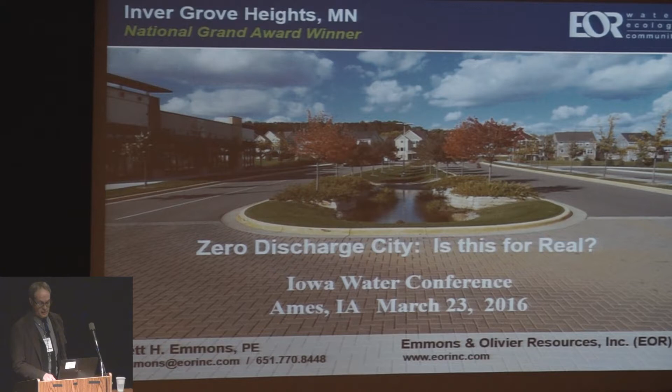So first of all, I just want to start out with kind of the context here and the primer. Stormwater management really and runoff management is evolving quite a bit. If you think back 20, 30 years, the philosophy was much more on a matter of getting the water away, move it on downstream, get it off your site, let somebody else deal with it. That gave way after the Clean Water Act, after we cleaned up the wastewater treatment plants and industrial discharge, and found that our waterways were still impaired. There were still a lot of problems. The fish were not safe to eat, not swimmable. We started coming in with these approaches of temporary storage, building ponds everywhere after the 70s.

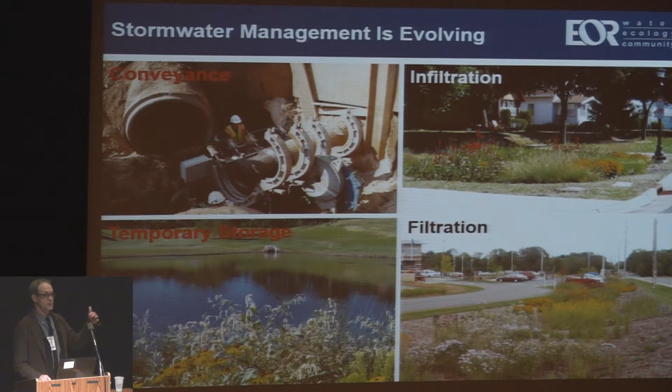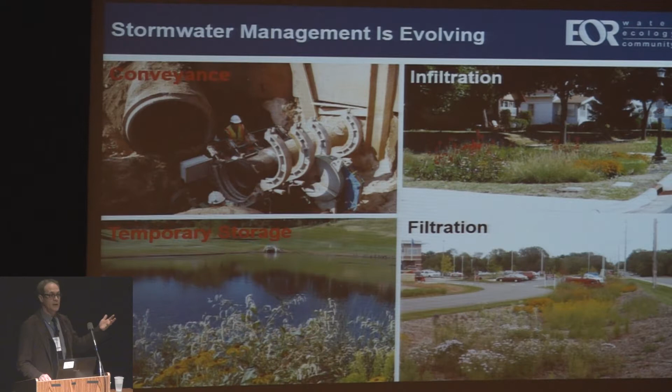After a while, though, we started realizing that still wasn't getting us far enough. It was kind of an early triage approach. It provides some benefit - it settles out some of the sediment and the pollutants that are attached to that sediment. But it really wasn't going far enough to get the improvement that we wanted. So the new modern era is much more based on principles of trying to keep the water closer to the source with infiltration, filtration, all sorts of methods like that. There are other methods as well. So we've kind of gone from this early stage of conveyance and short-term ponding to looking at stormwater very differently in the last 10 to 15 years, really. It's been something that's been sweeping the country from the coast, and I know in our area it's become a very big hot topic for runoff management.

I think part of that was reflected around 2009 when the National Academy of Sciences had a report that got some leading experts in the country together and said, you know, we've always been so concerned about the pollutants in the runoff, but really the underlying crux that's bundled up with all those concerns has a lot to do with the overall volume. As we alter the landscape, we're creating a lot more runoff, a lot more pollutants, but also a lot more runoff to carry those pollutants. And that becomes very hard to control. So their recommendation coming out of that report was, rather than focusing primarily on the chemicals, we need to increase our focus on the actual volume of runoff coming off the site. And then by de facto, you will also be addressing the chemical pollutants that extra water is carrying.

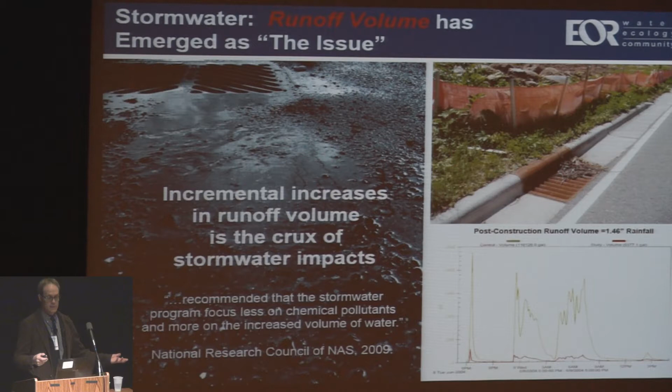So I think it's always important to start with, what is the problem? What is it that we're trying to talk about? So just a little bit of Hydrology 101 here.

In a natural landscape, these are generalized numbers. Typically you might see something like 10% of the water comes as runoff or yields out of the system. 40% typically might be taken up by plants, evaporated, and then almost half of the volume would percolate down into aquifers and replenish our aquifers.

When you change the land use, that changes quite a bit. In an urbanization setting, you can have a five-fold increase in the amount of yield and runoff that comes out of the landscape. That's a very large increase in volume, creating a lot of hardscape. You're impacting the soils—the processes that would hold that water aren't there anymore, so the water is typically being shunted off downstream.

There's still some vegetation in urban landscapes—you might have 30% still taken up by plants. A very small amount actually ends up percolating back into the groundwater. As we're seeing in our area where there's a lot of groundwater potable water sources, this is becoming its own big issue. Aside from all the water quality issues happening in surface water bodies, there's also this issue of what's happening with our water supply and those groundwater aquifers.

I would point out there are similar trends in an agricultural conversion from a natural landscape to an agricultural setting. The numbers are a little lower, but still fairly significant in terms of how much yield is coming out of the system when you change that to an agricultural landscape.

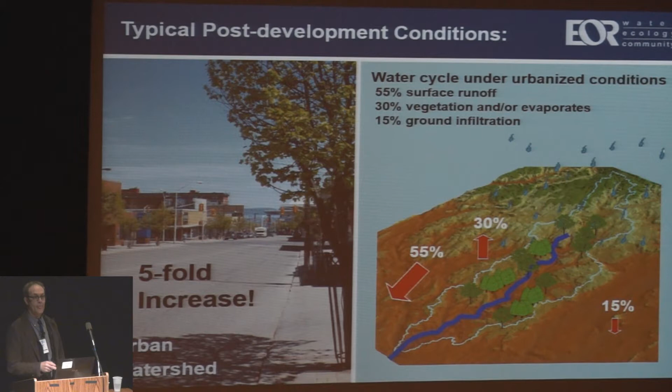Just to prove that I couldn't resist tweaking my presentation at the last minute—when I was in my hotel room and picked up the paper this morning, this was on the front page of USA Today, talking about water systems, and around the country some new studies coming out about how a lot of water systems are indeed in peril, and we're not really doing a great job of cleaning those up. We know that they're there, we know they're problems, but we're not getting to them.

So it is an issue everywhere, and I think it's an issue that's just going to keep getting bigger and bigger, both in our awareness of it and in terms of the critical nature of it. It's not something that's going to go away anytime soon.

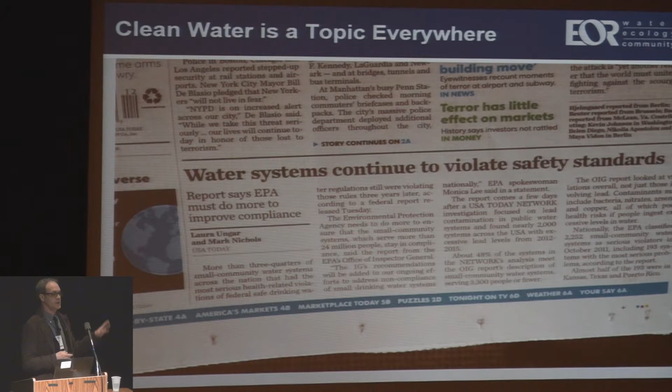What I'm going to do is walk you through a story of the city of Inver Grove Heights. They had a very large area that they saw urban expansion coming to, and they had some real infrastructure challenges. So they spent over 10 years trying to figure out how they were going to manage all the infrastructure challenges that they had with this.

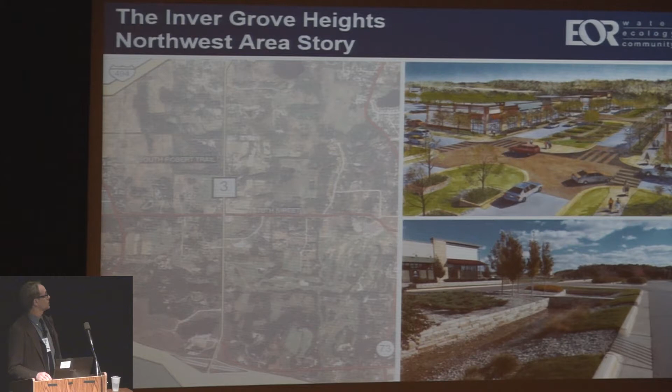And it turns out that stormwater really came to the top as one of the key issues that they were wrestling with, trying to understand how they were going to see development evolve.

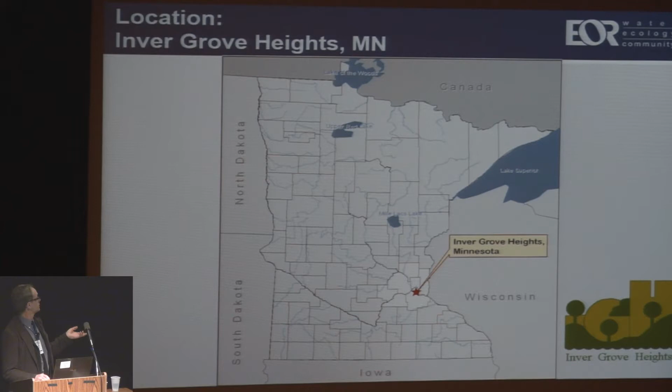The takeaway is, it's in a prime location—as with all real estate, location, location, location. There was pretty intense pressure to see this area develop because it was in the urban corridors, very close to interstates, actually a very nice landscape, and there was a lot of pressure to see this area develop, close to a lot of facilities in the metro area.

The area that they were looking at—much of the area is still not developed. A small portion is on this side, but they were looking at about a quarter of their city, almost 3,000 acres, that they were targeting for urban expansion to occur over the next 20 to 30 years.

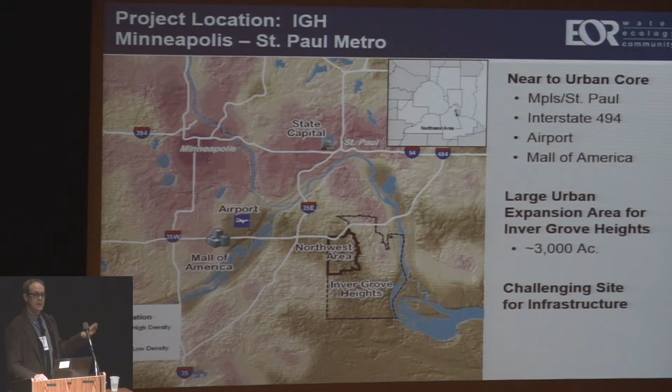But what they also started finding as they went in and did their initial studies before we were involved, there are some infrastructure challenges. Just the lay of the land made it very challenging in terms of how they were going to be able to bring services out to this area—sewer and water and stormwater facilities.

The stormwater part of this project started out because this whole area is actually currently landlocked. There are closed depressions. There is no stream or normal outlet that would carry this water away.

The original early engineering plans took a very traditional approach: the water would come down to one of the last basins through a whole system of pumps and pipes, and then they'd have to do something with that extra urban runoff. That's the typical engineering way of dealing with it. You can try to treat it along the way, but conventional wisdom says you have to get rid of it and send it off somewhere when those big storms come along.

Early on there was talk about a chain of lakes to the south of the area. As the previous speaker mentioned, there's a sense of place there. If this water ever built up high enough, they could pump it over or spill it over to this chain of lakes. Well, the Marcott chain of lakes is actually a fairly high quality chain of lakes. They're all groundwater fed and don't really have a great outlet system. You would then have to work on the outlet from there.

So many years ago, the city council made a policy decision and said, even though we're slating this area for urban development, we're not going to do it at the expense of wiping out these lakes. There was a lot of local concern that we need to be able to develop in a smart way where we're not giving away and damaging resources we care about, like the chain of lakes downstream. So the next proposal in the process was, well, then we'll have to put

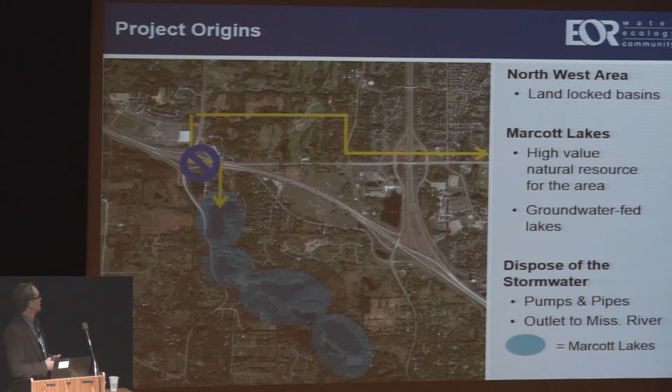a large pump and a several mile long pipe and discharge this to the Mississippi River. Well, that is feasible from an engineering point of view. You can always build something to make it work, but there were some questions and concerns that came along with that. The concerns can be highlighted in three points.

This is a very interesting process, just how this happened in terms of the psychology and human aspect of this. First of all, the initial engineering studies that sized all those pumps and pipes, and looked at what the area charge would have to be for all the land that was going to develop, really started catching everybody by surprise. The developers were concerned. They were saying, well, this seems really high, these charges. We see this as an obstacle to development, and you have these high stormwater development charges because of the place where we're developing.

There was this issue of the quality lakes downstream. We don't want to impact those. That took away one of the avenues. So the next one was, well, we'll just create a new discharge to the Mississippi River.

I think 15 years ago, that probably would have gone through from a regulatory point of view without anybody taking much notice, but that's no longer the case. We've seen this in other cases where new discharges are being proposed to the Mississippi River, and it's no longer a given that you can just do that and run it through the permitting process.

If you're familiar with the water quality world at the federal level, there are total maximum daily load, TMDL, studies out there. Lake Pepin, which is a wide area of the Mississippi River, because of old lawsuits with the state of Wisconsin and downstream communities that receive the Mississippi River, there are standards now in place to reduce the amount of pollutants in the Mississippi River as it goes down through Lake Pepin and further downstream.

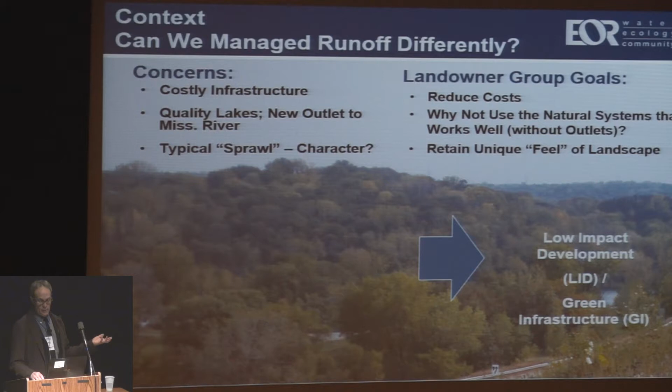Just a quick idea here in terms of low impact development or green infrastructure tools: part of it is also just land planning. What is the development pattern? How can you preserve some of the natural areas, some of the key areas that work in the landscape? Then there's a whole host of best management practices, BMPs, available now that weren't before—things like rain gardens, infiltration trenches, green roofs, harvesting and irrigation of water—which basically keeps the water much more at the source where it falls, using natural processes instead of just moving it downstream for someone else to deal with.

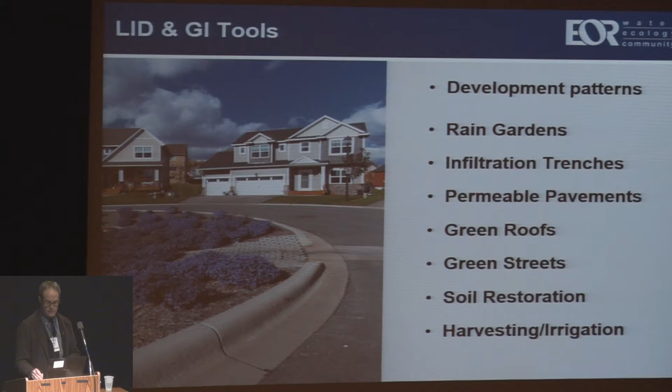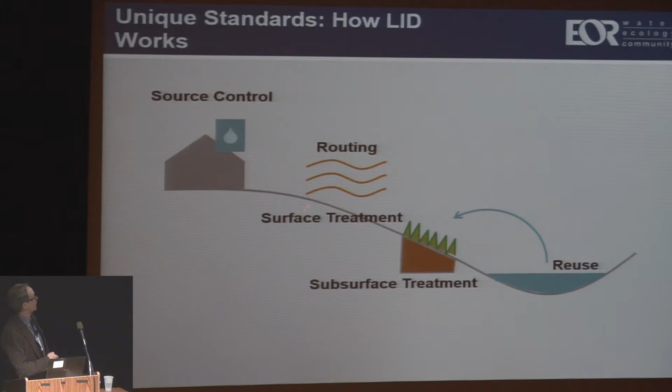Another way to look at how the low impact development approach works: you're really thinking of it, sometimes referred to as a treatment train, or a multi-stage process where you can be taking care of the water along the way. At the very source, you can be picking up water and not necessarily shunting it off your site. You can look at the routing—maybe instead of a concrete pipe, you route it in a way that filters and retains water. Then you can create some sort of practice, whether surface or subsurface, before it gets down to a basin at the end for treatment.

There are a lot of places along that path where you can extract the water and keep it. And even when it gets down to the basin, maybe you can reuse it somehow. These are all kind of the new approaches to stormwater management.

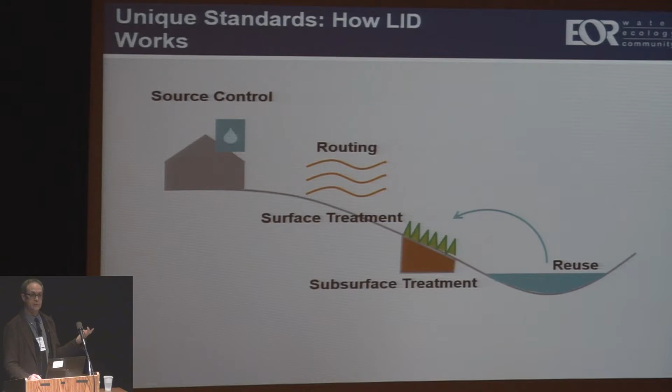We embarked on a several-year process of analyzing this system for the city, which included a lot of modeling studies. We started at a small scale, kind of proved that it could work, but we kept expanding it to larger scales until we were covering the whole 3,000 acres, showing from a water budget and modeling design point of view there was a way to preserve the water in the system.

Part of that was using these low impact development techniques. Those were bundled in this whole assumption.

The city was insightful enough to have us do some monitoring, so we had a year and a half's worth of rainfall runoff monitoring, which let us validate and calibrate our models. We had very high confidence in our modeling data and what we were predicting. We even had a very large storm come through, about a 100-year event for our area during our monitoring, so we felt like we had a good range of what was happening.

We also dove into some of the planning standards, city standards, and some of those are actually designed in a way that's counterproductive to low impact development—wide streets, curb and gutter, things like that. So we looked at how to better adapt those to low impact design approaches and take out some of those barriers.

We developed an entire low impact development stormwater manual for the city. We knew this was going to be new for developers and for city staff, so they needed a technical resource where they could turn to get that kind of information.

The other thing we found through this whole process, and I think credit goes to the city, is that this was the first at this scale—this idea that we could actually manage all the water and not create a new outlet using a low impact approach. We could not find anything like it in the country. We were asking all the national experts, and there was nothing out there of its kind that had been done at this scale. There were little things dabbled here and there, but it was never the ultimate solution—always just a piece combined with a conventional outlet approach.

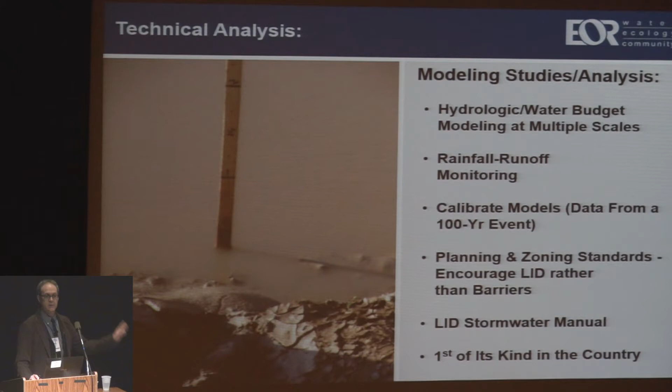Having asked around again recently, I think we're still in about that position. This is probably one of the first precedent-setting cases in the country to take this approach of using low-impact development to a very high level and not necessarily relying on a conventional outlet. So we'll talk a little more about how we got there and the pieces that get us to this groundbreaking approach.

To highlight some of the technical standards we developed as part of this, we felt were necessary to put this kind of system in place.

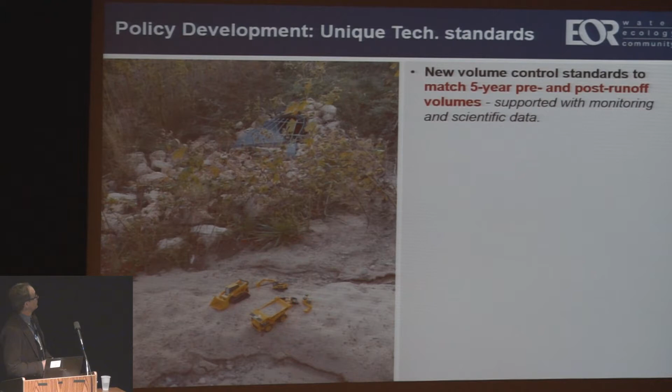From our monitoring data, we realized that a lot of these landscapes—depending on the soils and the cover—were not really creating much runoff up through a 5-year event, which is a fairly large event, on the order of a 3.5 inch event. Most of the water would stay at the site scale before runoff would be generated.

So that became our benchmark: every time a development comes in, it has to meet our low impact design standards. That means they have to analyze the precondition, and then show that when they build out the development and add all their practices, they can meet that pre-amount of runoff. It's not the same as saying no runoff comes off your site—it's saying whatever naturally comes off the site based on your soils and land cover, that's what you're still allowed to discharge, but you have to retain the rest.

So we had a pre-post 5-year volume control standard, and we were able to support that with our monitoring data.

A lot of these practices end up being infiltration practices—a lot of the volume control approaches are. One of the early failures of infiltration basins and infiltration practices was things that were fairly predictable and could have been prevented. What we found was that pretreatment is oftentimes overlooked, especially during construction, but in general too.

When you have a low impact designed LID BMP, you need to protect it, or you'll constantly be in there trying to fix it and maintain it. You need to have a lot of that sediment carried with the runoff settled out in a pretreatment area before it goes into the actual volume control feature.

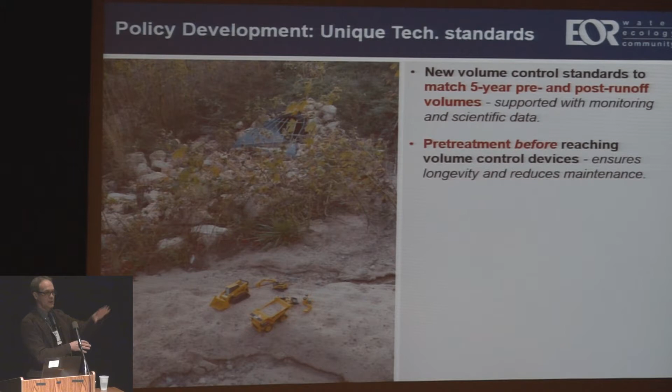So we have pretty rigorous pretreatment standards that have to be met. Another big piece of this is that when we were studying this, we noticed there are a lot of very large natural depressions that, since the glaciers left tens of thousands of years ago, water has been seeping into. So when those big events came, there was still plenty of storage in the system to retain that water.

So we came in and mapped all of these, and made it a condition of development that these flood-prone areas, which occasionally see water, are areas we feel have been proven. We don't want to fill them here and replace them someplace else. They already have a proven track record, so let's just stay out of it.

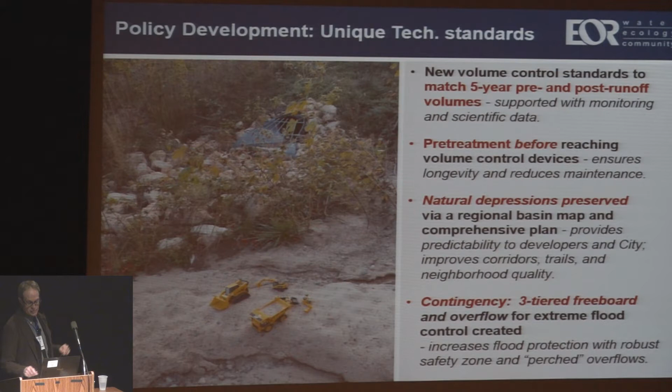Finally, we had to look at what our contingency plan would be. This obviously carries some risk with it. What are we going to do in terms of extreme floods or scenarios that go beyond what we're projecting? We were projecting fairly conservative scenarios, but we needed an approach. So we came up with an interesting three-tiered approach to managing that risk that I haven't seen in many other places. I'll go through each one to explain.

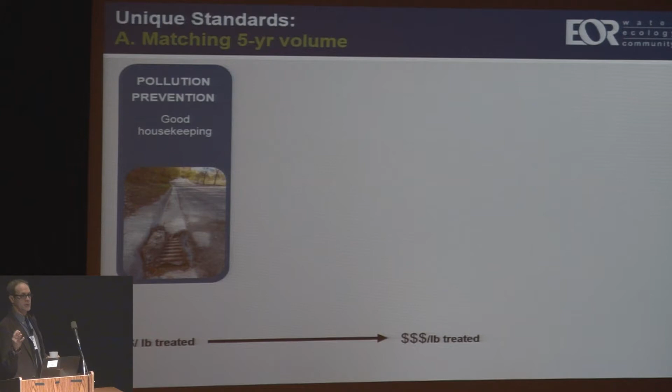Here again, on matching the 5-year volume control. This is another set of slides that talk through strategies for retaining the water before it just runs off. Part of it is looking at pollution prevention: what do you do at the site to not generate as much runoff, pollution, or sediment going downstream?

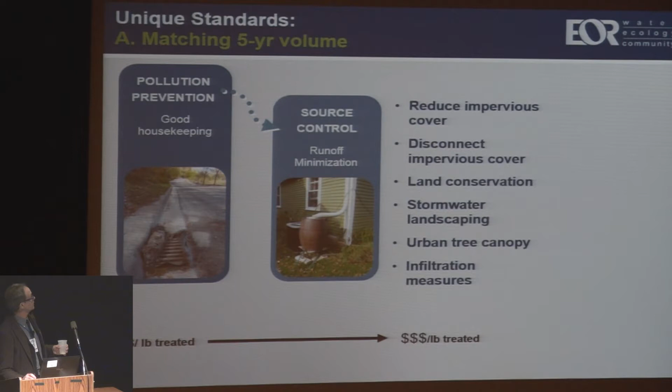Next, what can you do very close to where the water falls to retain it there, whether it's stormwater landscaping, disconnecting impervious areas, or reducing impervious cover? There are all sorts of strategies that can keep the water very close to the source.

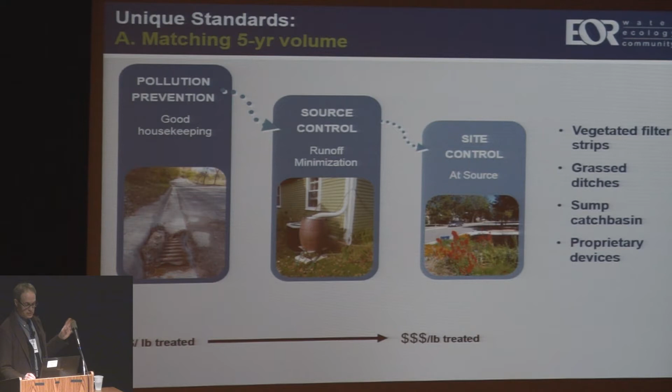Then there are also a lot of small-scale site controls, things like rain gardens, grass waterways, and best management practices. Finally, after you peel off all that water, if you still need some sort of structural centralized feature, you can have that. It's typically a lot smaller at that point. And then finally, you discharge into whatever water body is downstream. So all of this needs to happen at the development scale before it goes into these regional basins.

So the next part of this was a pretreatment standard. We had a fairly rigorous pretreatment standard where we made sure that before water discharges into one of these volume controls, it has to go through some sort of pretreatment.

The interesting thing is that a few of these filter strips, where water just sheet-flows across the flush curb and filters down through the grass, are actually extremely effective. It doesn't necessarily imply a lot of cost or land usage to get the benefit of that filtration.

Vegetated swales—if water runs down, it can also run through a vegetated area, where there's a lot of filtering and uptake of water and sediment. If you have a rain garden or something more concentrated, there are all sorts of varieties now, different kinds of small sumps right at the inlet of a small-scale practice, which retain sediment there and are easy to access for maintenance.

And then probably the least favorite, but one we still said was allowable, was to create some sort of pre-settling pond, a standard dry pond or wet pond. It would act as pretreatment before water went to the final treatment area, which is also one way to remove sediment. I'd note that this takes more land than these other approaches, and can often be more expensive.

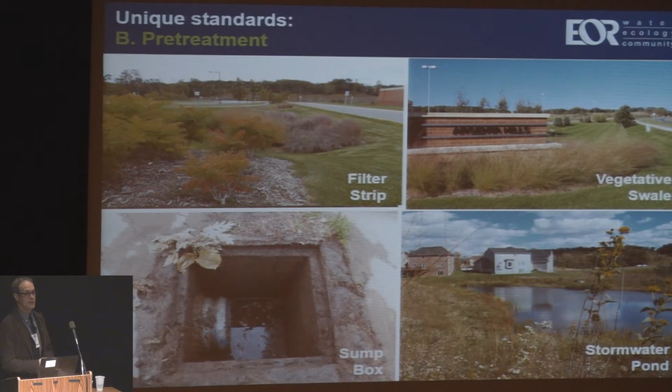On the third part, about natural depressions and what we started calling the regional basins, these were very important for us to know in the system. We mapped those throughout the city, including their starting water levels and high water levels, for all sorts of back-to-back, 100-year events, fairly high events, and said these are the regional basins that development needs to work around. There are some interesting land use pieces we built in that made that also a lot more amenable to the development community.

Over the years, having introduced new things like wetland management planning, developers can deal with a new approach or these standards, but they want to know going in what the ground rules are. I think it's critical to let people know, coming in, these are the areas we expect you to set aside. We can always fine tune with better data, but this is generally where they are. So when they go to acquire a piece of property, they know what they have to work with and what is off the table, and that's something they feel is very workable. They come in and aren't surprised later, like thinking they bought 40 acres but only having 30 developable because of some surprise. As long as they know that going in, I've seen over and over that this is a workable way for the development community to move forward and really know what they're getting into.

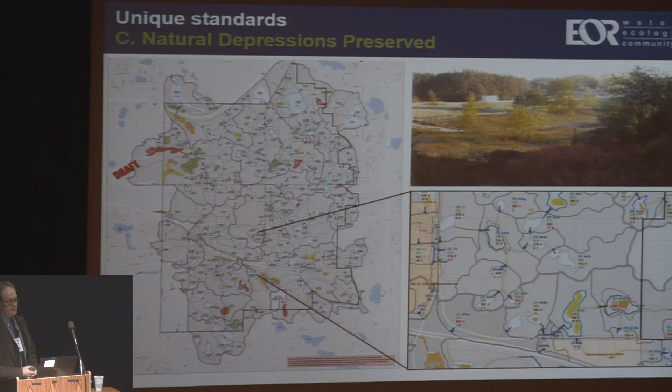Finally, on contingency overflows and our backup plan: because of the character of these natural basins scattered throughout the community, some were shallower and would overflow in a very large event down to the next basin. Some were mid-level, taking quite a bit of water to fill, but if you got within 6 to 18 feet of the overflow, the water would spill out. Then we found some basins as much as 60 feet deep that would have to build up that much before reaching the overflow. It seems unimaginable we'd ever use all that 60 feet, and obviously as the basin gets higher, it's also getting much larger with a lot more volume.

So we ended up with a 3-tiered standard. If you're building around one of the shallower basins, you use a conventional freeboard, or safety factor, on top of where buildings need to be built above the high water level. You use a conventional 2 feet above the 100-year high water level calculated, or 1 foot above the overflow, whichever is greater.

But for the next category of basins, we had an intermediate step where we put in the idea of a higher freeboard, giving ourselves much more of a safety valve inside the system—6 feet instead of just 2. We also provide a perched overflow because of those depths; it was not that costly to build an overflow to the next basin. So we'd have a backup plan, or could even access this if needed at some point. The home would still be below some sort of overflow, but the high water levels, even in extreme conditions, are below that overflow—so we're not creating a domino effect of always pushing water downstream to the next basin and causing a problem there. We're keeping the water in these small, compartmentalized, segmented areas.

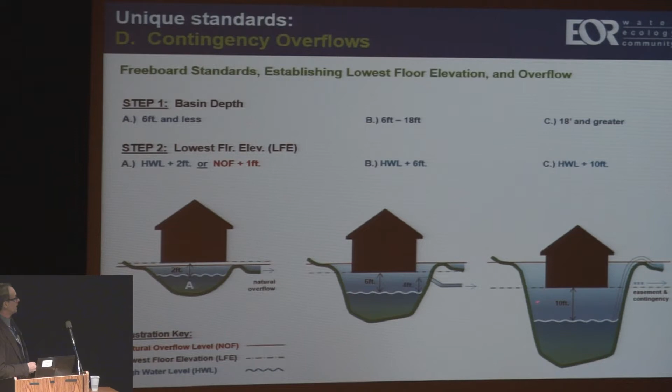So I want to highlight a few of the policy elements of this. We talked some more about the technical side. Here are some fairly unique things we came upon with this whole process, working with the planners on how to do this. It had a nice interplay between land use planning, zoning, and the engineering and design side. We found some co-benefits, some convergence where we saw advantages on both sides of working together.

So one of the unique things we did, partially to preserve the natural landscape we talked about earlier as one of the goals, is require that we preserve 20% of the open space on the site. To clarify, we didn't let developers say they've got an island median that's 8 feet wide and 12 feet long and count that as green space, nor backyards. This is true dedicated green space outside of private property, that is continuous, has to have a certain width, and has to be continuous within the site. So it really is preserving more of that natural landscape feature. That's a big deal - that's taking away people's land.

These regional basins can be part of this 20% open space. The BMPs can be included in the open space, and then also we're looking for this to be part of a trail network and a kind of community connector facility that helps keep that landscape there.

I'll talk a little bit about the other part of this that works well, the zoning flexibility. I have a slide here where I'll walk you through this. Basically what we were trying to accomplish was a land use approach of clustering that was becoming more popular at the time - maybe allow greater density, but try to have some areas set aside. That way you can still get the units out of it, but you're giving a little more flexibility on the site. So we came up with some zoning flexibility.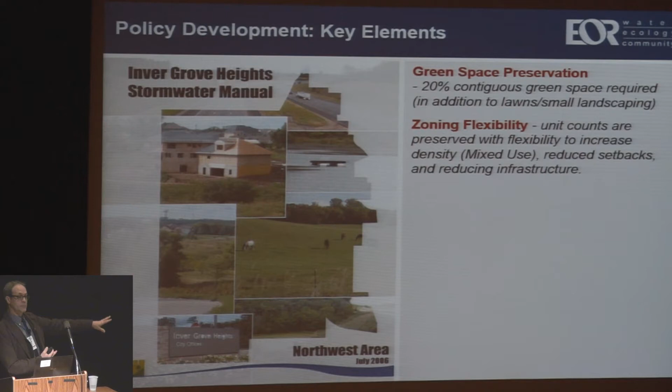Basically you're able to calculate what the underlying zoning would normally give you in units. You set aside 20%, and with the 80% you have left, you can put those units on that 80%, which includes needing some density flexibility. But basically the development community can get the same number of units out of it that they would have gotten before, as well as creating some amenity units.

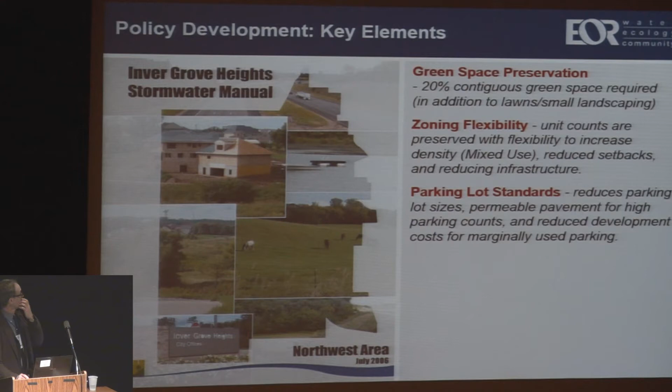Parking lot standard is one I decided to highlight. That's one we went around and around on, and we all kind of agreed that the trend towards these large commercial centers and office centers with very large parking lots that never seem to be full just seems wasteful - we're putting a lot of expense in that, creating a lot of runoff, heat island effects, all these downsides including the monetary side. Maybe we should go back and relook at those parking lot standards. So I'll touch on what we did there.

Some simple things we were seeing happen a lot with the local site development approach - look at narrower streets. We worked with the city engineering department to come up with a one-side parking narrower street, whereas they were normally going to 32, 34 foot suburban low volume streets. We actually tightened that back up into narrower streets. Some developments can do a private street and even go narrower than this. The city allows that as well.

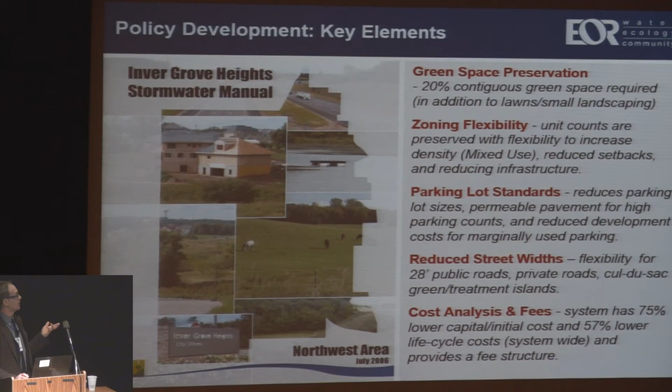And finally, I'll touch on a little bit of the cost analysis and where we landed in terms of the cost of coming up with a whole different approach to stormwater management.

Going back to that 20% open space and zoning standards, basically what we needed to create was this idea that in a very normal suburban landscape, certain blocks of land would be set aside - this is single family residential, this over here next door is multifamily townhome density, this next spot is apartment densities, but they're all very segregated. There's a lot of new urbanism planning approaches that say it's not so bad to have that mixing of uses.

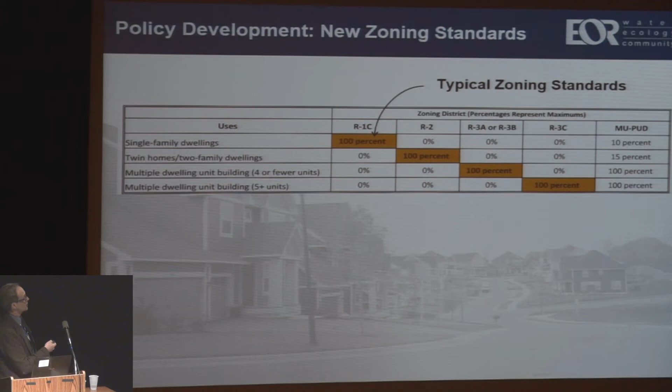So what we did when we said you have 80% of the site to work with, and we need 20% for open space and stormwater, was instead of saying all of your site has to be kept within one kind of size of lot, we actually created this whole table that allowed a lot of blending or blurring of those lines.

So if they were in an R1C, which traditionally the community had been single family, 3 or 4 units per acre, they can do all the land they want to develop at that density, but they could also go up to the next density to get their full number of units. They now have more flexibility in how they do that. As you step down through the different densities, there's always the ability to come in and use different densities and mix them on a site.

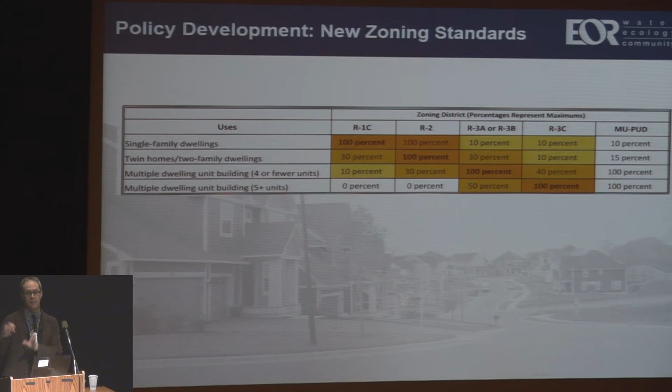So that met some urban planner kind of goals, and met our goals of being able to have this 20% open space available that we needed. It gave that extra increased flexibility across the districts. Which, I don't know, it's somewhat novel in that this was kind of a stormwater planning integration that I haven't seen very often.

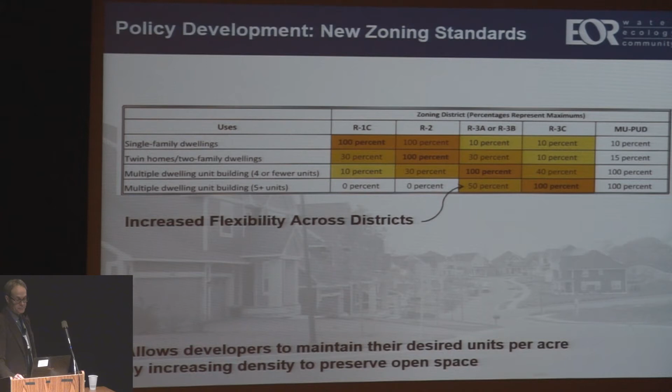Next, I'll talk a little bit about the parking lot standards. This one I think has been fairly successful. There are many different pieces of this, but I just tried to pick some of the highlights. What we found in the community was we started asking staff, and they tended to agree that it seems like parking lots, everyone's just borrowing from everybody else's standard, and everyone has this idea, kind of like the McDonald's trend for a while, that bigger is better, the more the merrier. But we started to think maybe we should put some of these things on a diet. Maybe bigger isn't always the solution.

So in the old standards in the city, there were certain parking counts by the size of the building being built. You had to at least create this much parking for that amount of space, by city code, and you could go up to really limitless. If you wanted to build a parking lot twice that big, I guess that's your prerogative.

So we really turned that around and said, no, we want to start talking about putting caps. It's not that you can't go above the cap, but here's our expectation. What we said is that old minimum is now going to be expressed as 75% of that old minimum, which is now the maximum you can use for a conventional parking surface. If you want to go up to the old minimum, and we've had some projects do that, you can still do that, but what you're going to do is build the rest of that parking space in a permeable surface.

And we even, the planners had come up with this idea, made it a little more punitive. If you were to propose a parking field larger than the old minimum, you actually have to do at least half of it in permeable and/or structured stacked parking. So it's been really nice to see this play out on several of the developments that have been built in Inver Grove Heights.

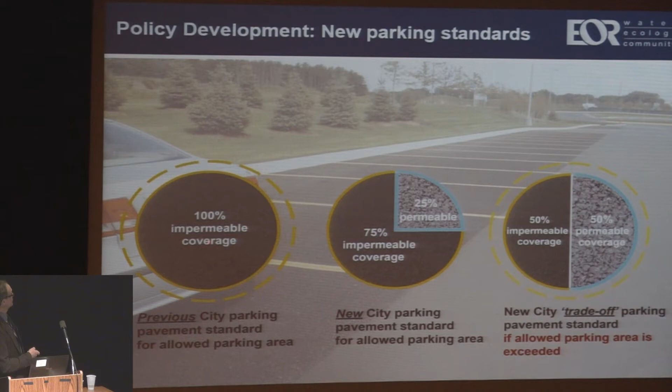This Target in the background I'll show you in a minute. They had proposed doing something bigger. They know Target understands themselves as a store that probably is going bigger than they need to, so they actually quickly talked themselves down to not triggering this. They came back to this size, and so we said, well, this is what you're going to have to do. So they did end up putting 25% of the parking into permeable stalls, like permeable asphalt. I'll show you some of that here in a minute.

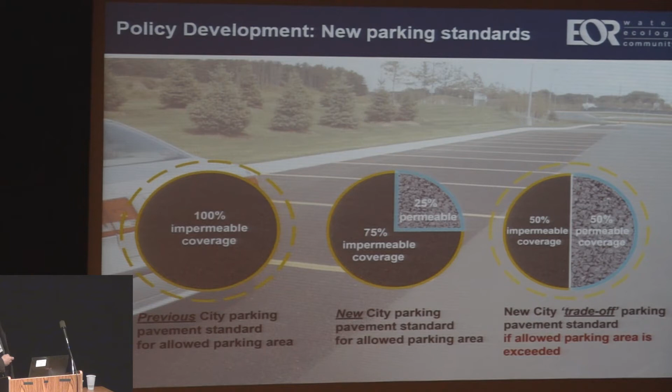And then there's another site that was a business park. They came in and saw the standard and said, yeah, that's fine, we can go with this size, but we're not really sure if we really need all those stalls. Yeah, that's probably true, you might want to see if you really need them before you build them. And they said, well, this permeable stuff seems kind of expensive to build - it can be somewhat expensive. So they actually just built out the regular asphalt part, and then put a green space area there that they could add permeable onto if they ever needed it. But they took the approach, big surprise, let's wait and see whether we really need it, rather than building these very large fields that seem like parking fields that don't very often get utilized completely. So that was another win, I think, where the developers spent less money and we got a better outcome.

They were comfortable with the idea that, yeah, they probably are high, we probably don't need this, we can just plant it with grass right now, and later if we need to add on, we'll add on later and incur that cost. Let's wait and actually see whether we need it first. And this was something the city had to get their arms around too, since a lot of times the city is also requiring this development, so both the development community and the cities need to be willing to look at this differently.

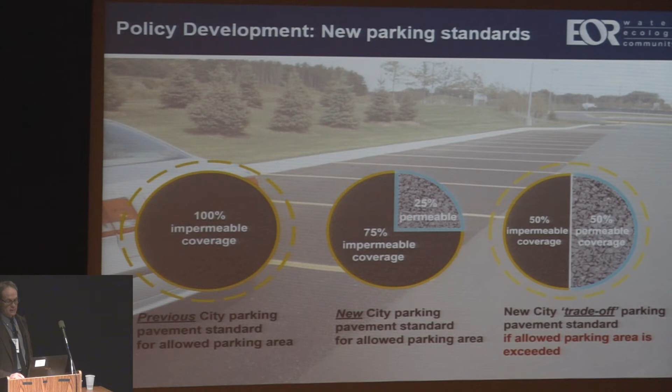So just to compare and contrast, and I'll look at some costs in a minute, the old approach, a very typical traditional approach looked at about 15 years ago, was a bunch of pumps and pipes. There were almost 13 pump stations to move the water through these series of depressions to connect the dots. There was 24 miles of storm sewer piping, trunk storm sewer, to make all this work, and there would have been a new outlet of almost 4 miles out to the Mississippi River, which also had all that cost implied.

In this enhanced LID, low impact development approach, this plan used a lot more low impact design, green infrastructure tools that needed to be done on the development scale. Interestingly, we get all sorts of better outcomes with this. When you use these green design tools, you can outperform head and shoulders above any conventional design. It's almost impossible to compare them side by side.

You're going to get much better water quality outcomes, and you're going to get that volume control. I started out saying that's really a key driver in a lot of these problems - you're actually reducing the volume. The conventional approach would not have done anything with the volume.

You're creating more open space often when you do this. This is becoming a national trend, where some of the advantages of these new approaches is actually just the green landscape created in an urban setting. The fact that it happens to do some stormwater stuff is something people like - maybe you don't realize that's happening, but it's like when we walk down the street, we have some greenery, some shade. It also replenishes the groundwater, which in our area is becoming a very big deal, instead of just shunting all this water downstream to the river.

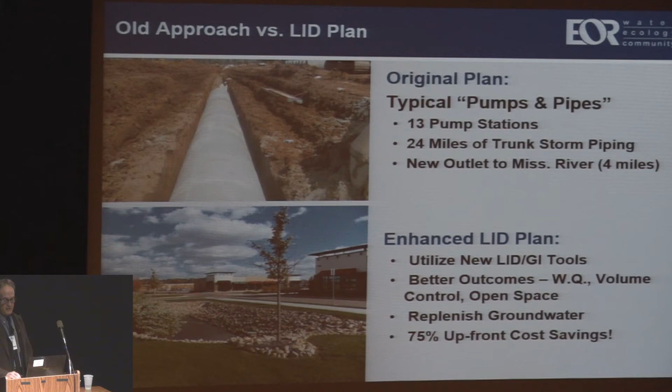So what we did is we ran a whole life cycle cost on this. The original cost for the traditional approach had upfront infrastructure costs that have to be done - you have to develop a user fee to pay that infrastructure cost, and you'd have to have O&M over the life cycle of all this. That was a big concern: well, we're going to build these green techniques, but maybe the operation and maintenance is just going to eat us up at cost. So we looked at a 30-year life cycle cost.

Interestingly, what we found going around to some communities that had built those wet ponds over the years - they've been around now for 15, 20 years - is that in a way they could fool themselves and feel like there's zero maintenance costs. Well, until the pond fills up with sediment, and then it's actually quite costly to go dredge that pond. We were starting to find contaminants in some of the ponds that needed special handling. Aside from that special handling, there's a lot of cost just in doing that. It's something that gets delayed for every 15 years or so, but it is a cost you have to account for. Even at the operation and maintenance costs, they're very similar.

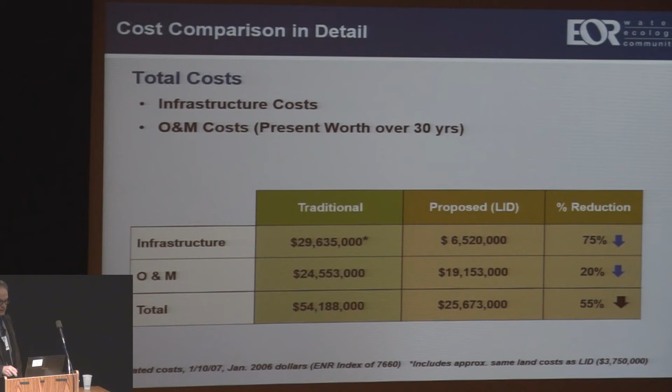So overall, if you take a life cycle cost of both the upfront savings and the O&M, you end up with something less than half the cost of that conventional system. Instead of something like a $54 million investment with almost $30 million in upfront cost, you can cut that by more than half. People like graphs who take a look at it - here's just a graphical representation of what that infrastructure cost and the O&M cost look like in comparison. So, pretty compelling argument.

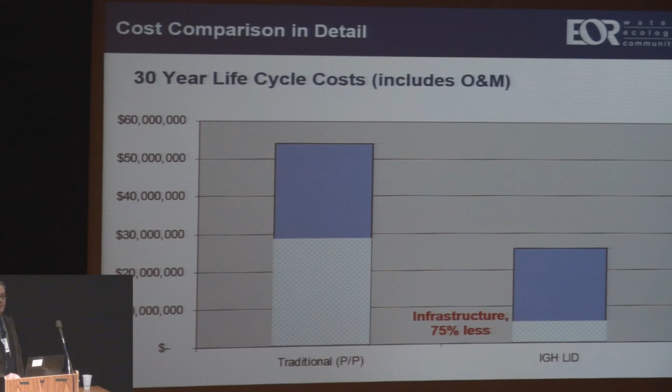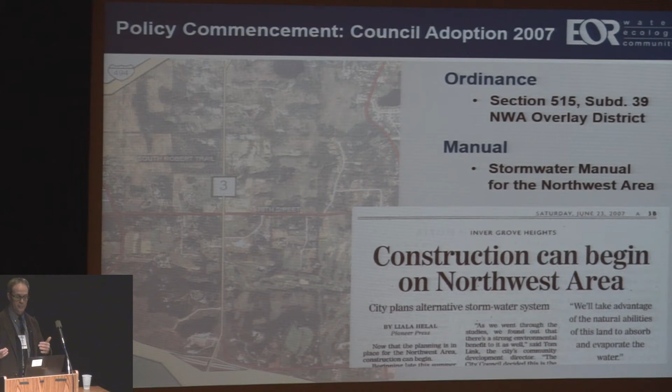So in 2007, we had been writing all these ordinances. All the ordinances were in place, the stormwater manual had been written, education sessions were out there, and the city embarked on full-scale starting their build-out of this 3,000 acres. It acknowledged that the stormwater piece was one of the main constraints they had to work through to get this off the ground. So next I'll show you some of the first projects to get built. There was obviously a hiatus when the recession came, but this has been one of the first areas to pick back up with development, and they now have quite a bit of development going on, and have for the last 4 or 5 years.

So from the city and landowner perspective, we can reduce costs for the development, the infrastructure part. Something I wanted to point out too is with that recession coming along, a lot of the old system would have had to have that pipe to the Mississippi River built first, because as soon as you start creating runoff in these dead-end systems, you don't want people to flood, you need to be able to get the water out. That's the way that system is designed. So what you find is you end up investing right up front. As soon as you start development, almost half or more of your initial cost has to be in place already to create that first backbone so you can start receiving the water.

In the system that we designed, it's actually very segmented. So you can come in and develop in a certain area, take care of your water in that area, and then you're done. So it's a very low cost. Now, something we really didn't think about going into this, but the recession brought to light for us, was that we actually saved a lot of capital costs because when those first developments were starting to be built, we didn't have this huge expenditure right up front. It can be very staged and brought in just as needed. That saves a lot of interest costs, and it's a lot better financially for the community.

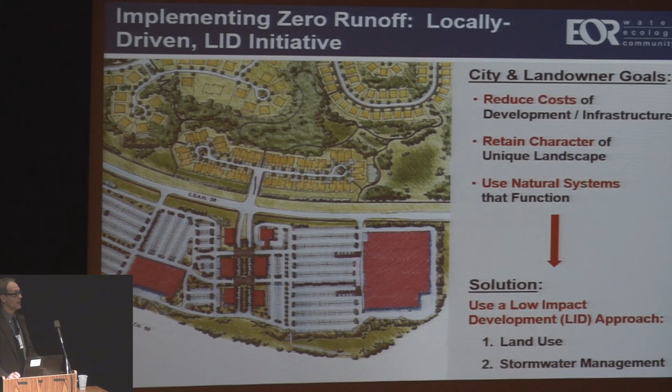We're able to retain the character of the landscape we're trying to accomplish here, and come up with these natural functions - what are the natural systems, and how do we use those to our advantage, which led us to this low-impact development approach, which this development illustrates. It had several different multiple land uses. So what we found coming into this, and what's compelling about it, is you're really seeing a whole multitude of benefits that keep stacking up with this approach.

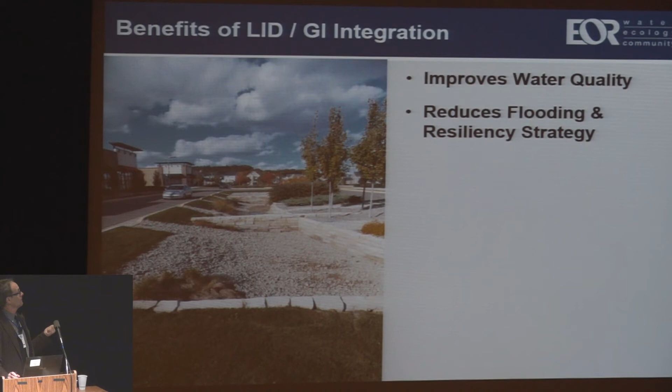You're having improved water quality - there's better water quality out of this development than there would have been under that conventional ponding approach. Actually, with the freeboard, the way we've done it, there's a community right next door that built out with that pump and pipe system, and they had a lot of faith in that. Well, they've had some large events come through that have actually flooded several neighborhoods and had some major retrofit projects they're now having to go back in and fix. So this actually has much more contingency and much more resiliency built into it, even for large events.

Reduces costs, we've already talked quite a bit about. Preserves the landscapes - our 20% open space, the way they're trying to design around that has created some nice landscape features, and the water bodies downstream of this are not receiving all the polluted runoff from these areas that might have been only partially treated. We're replenishing the aquifer, which is a big deal. We're not just running this water off downstream.

The other thing I touched on, we're seeing more and more of these new projects, is if the designer - which is a challenge - can think and plan early on to really integrate this into their site planning, we'll see some examples here. You can actually use less land for stormwater facilities with this new creative approach than you would with a very conventional approach where you have to have these big ponds that eat up chunks of the site.

We want to create the idea that you can actually create quality landscapes in these developments. The lead developer on this project, where we were brought in to the design team, because it was the first one in the community, Argenta Hills, is one of the things I'll remember in my career for a long time.

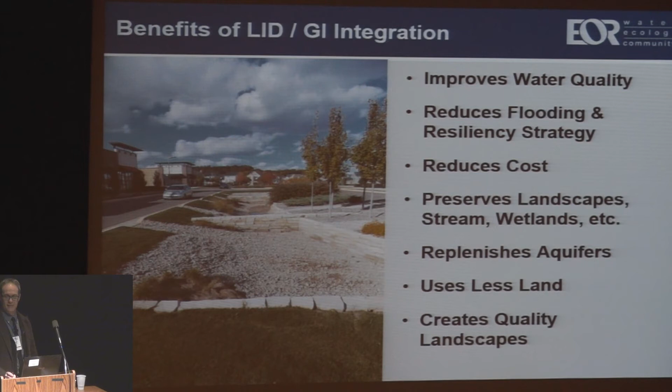He had been there all along through the planning. When we actually built this and Target was moving into their store and everyone was moving in, it was like, I knew it was coming, but this actually looks so incredibly nice. I didn't even expect it to look as nice as it ended up looking. So it really was creating quality landscapes with this too.

I think this is one Argenta Hills is this development. It started out as, maybe we'll go back to the last slide. Not on there, there's a map. The southern part of the site is all a commercial center. There's a new county road that goes through here to connect some other pieces of the county road. And on the northern part of the site is all residential with a lot of rolling hills.

So this is the kind of downtown Main Street area. They wanted it to have kind of a very nice feel as you come into this commercial center, with the Target off to the back. And so this is one that I talked about. I think a lot of people come in here and maybe don't see the stormwater. And where's the big stormwater pond here? Well, it turns out stormwater is integrated throughout this.

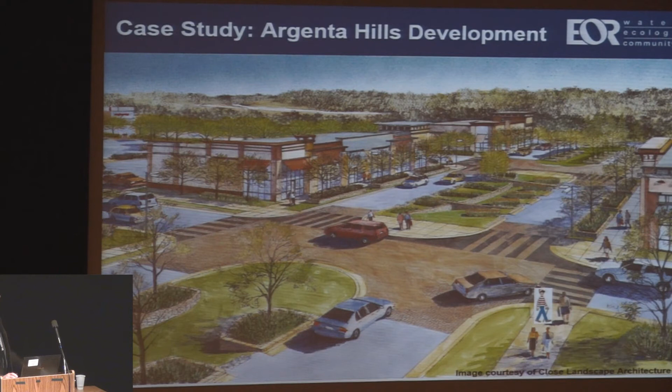There's at least 7 different stormwater practices that are depicted here, and I'll show you some photos after this has been built. All the medians, originally the landscape architect had designed them to be mounded. We said no, we want to use these medians and be able to take the water and let it soak back into the ground. So we did. We depressed all the medians, so there's stormwater going into all these medians. Rain gardens, if you will.

Next, the intersections, we ended up using permeable pavers for those. It kind of creates a nice look. It provides a lot of volume that we can retain on the site, so it's not taking up any of the site or taking it away from use. It's just using it in a different way with these permeable pavers to infiltrate the water.

Next to some of these commercial buildings on Main Street, several of them have little rain gardens right at the edge that takes their roof runoff. And since the roof runoff is fairly clean, it doesn't need to be pre-treated like other runoff would. And actually, they show up very well. You'll see in some other photos there's quite a bit of porous asphalt because of the way they wanted to do that parking lot standard. They had a lot of porous asphalt stalls included here.

So, when my kids were growing up, I used to read them Where's Waldo. I call this my Where's Waldo stormwater management approach to development.

So here's the Main Street as it was being built out several years ago. I'll just run through some photos of this commercial development. We really felt like, here's a place where we're going to have very high impervious, very intense development. We're starting out with one of the harder type scenarios, going from no water running off of this site downstream to a very highly developed site. This is going to be a good test case to see how this looks.

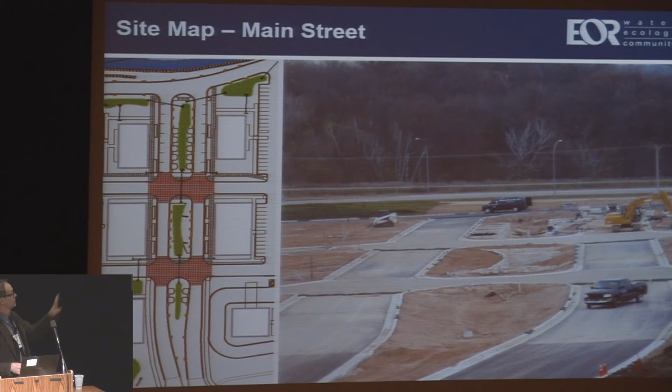That was one reason why the city said, yeah, we'd like you to be on the design team as this gets done. This is going to be one of our benchmark projects that we're going to start in the community. So here are the median islands being created. Here's the permeable pavement as it was being installed in the intersections. You can see there's rock courses that allow the water to drain straight down and make contact with the sandy soil below.

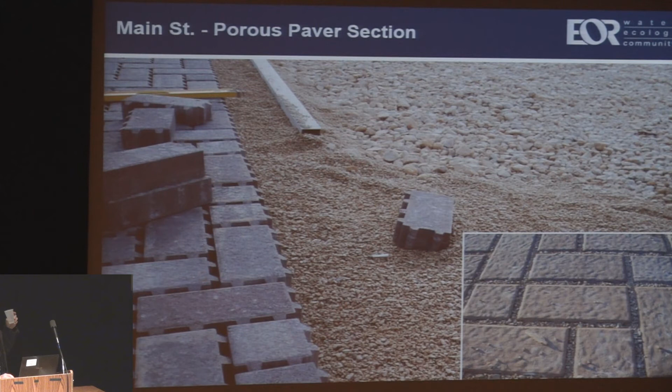Here was right after it was finished being constructed, and they were starting to irrigate and get everything going.

Here's what it looked like right after a storm. The water comes in off the street and surrounding areas and flows into these depressed islands, then infiltrates. When it gets up to the spot before going over the curb, it can flow down to the next island. I've seen water in the first of the three fairly frequently, in the middle one occasionally, and rarely even right after a storm have I seen much water in the third of the chain. All the water is gone by the time it gets that far.

This project was tested about a year and a half ago when we had some fairly major flooding in the South Metro area, over 10 inches over a couple days. There were roads being washed out, but this site did not discharge a drop. It really wasn't even tested very hard. Some regional basins in the area had a little bit of water in them, and they performed much better than we expected.

Here's some more shots of Main Street, and that's the new residential on the other side of the street. That's all been built up over the last several years.

The contractor was very good to work with on this. These are the permeable pavement stalls, with conventional pavement out here too. We put them in with asphalt, which is a little more susceptible to wear and tear. You can also use permeable concrete or pavers. Asphalt probably needs the most care, so we put it in kind of the overflow parking area, just off to the left of the Target store, where it gets the least amount of traffic.

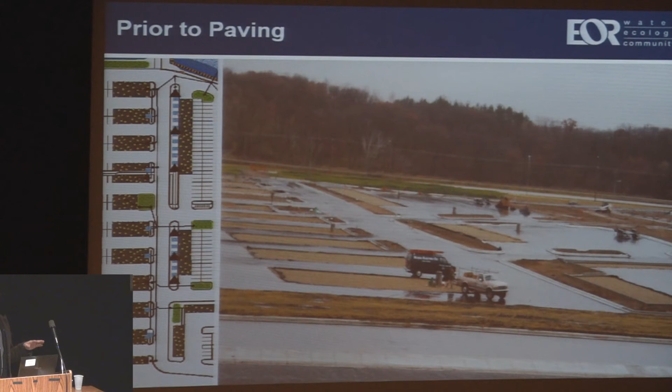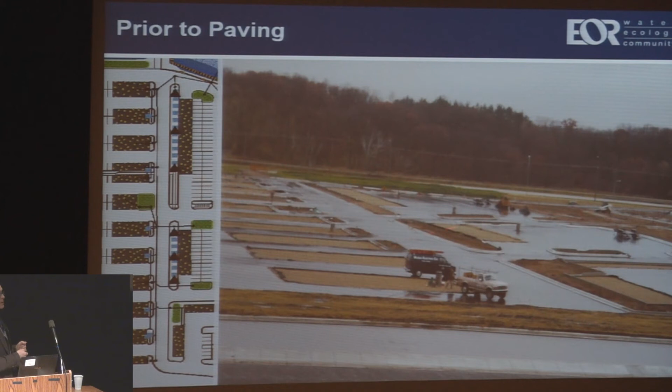Fortunately, they worked with us very well throughout construction to make sure all the infiltration BMPs were well protected so they weren't contaminated with sediment. They did all the regular paving and sediment control first, and then we came in and excavated this out and put in the rock for the permeable pavement, so we didn't end up compromising our practice right away.

I don't know how many people have seen permeable pavements being installed. I think they're fairly common here in Iowa. Raise your hand if you've seen permeable pavement projects. Okay, half of you have seen that.

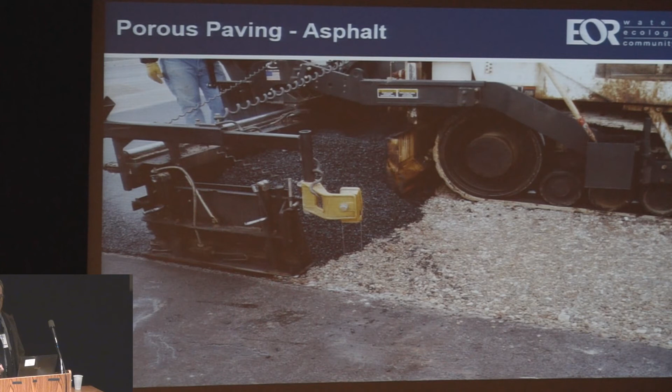Here's permeable asphalt being laid down in one of these parking lot bays. Obviously the water goes in. It's interesting to see this after snow melt - they pile a lot of snow in the corners of the Target parking lot, and as the water comes across the regular asphalt and reaches the permeable section, it goes a certain number of feet and then all that water just goes down into the ground.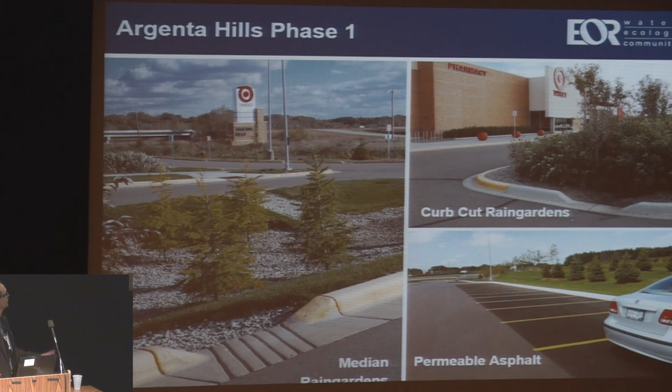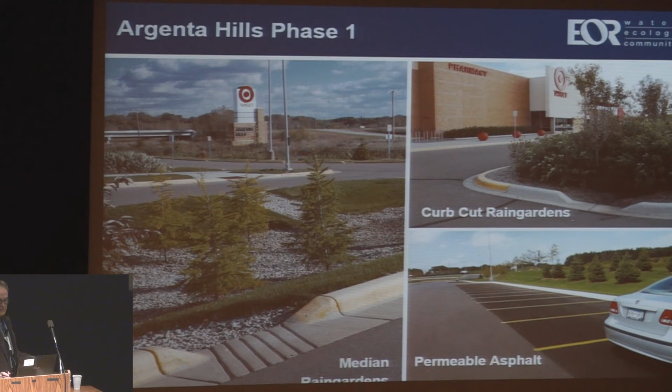Here's more of the permeable parking asphalt. A whole variety of practices - one thing to note is you do need to get water off the site, either with a flush curb or with frequent curb cuts to let it filter down into the BMPs, which can be a clever way to not take up as much space and cost.

In the residential area, there's quite a bit of open space - that was more of the rolling part of the site. They actually have more than 20% open space, closer to 30%, with a whole network of trails running through these wooded hills. It's a very special, neat neighborhood if you ever get in there. They started requiring all the cul-de-sacs to have rain gardens in the center rather than just more asphalt. So it's serving a purpose, and I think it really makes the area look very nice.

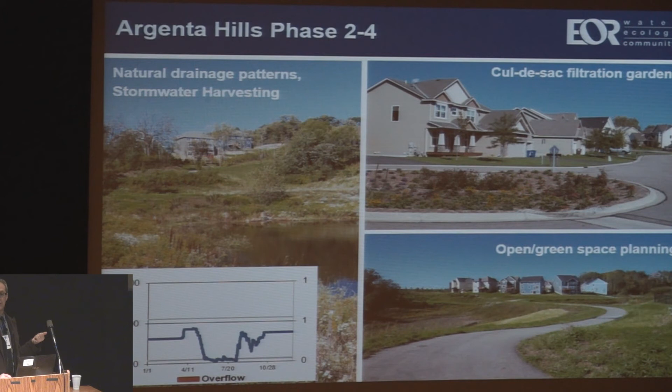We had one phase that had such difficult topography that the developer still wanted to go into a centralized pond, but they were running out of space to do both a pre-treatment pond and a regular pond. So they decided to use what we started seeing a lot more of, which is stormwater harvesting and use, where we catch the water in a pond, but then take it back out and irrigate it onto the landscape.

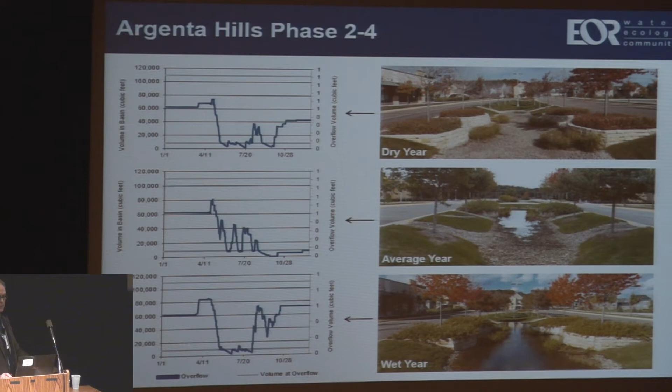I'll go through these quickly. There's some slides here. I was invited out to North Carolina. There was a roads conference, so we also wanted to show some in-road type scenarios where these kind of new techniques have been used.

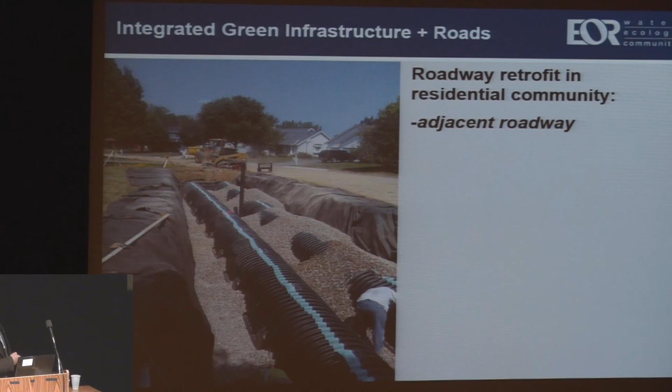This is an infiltration chamber off in a right-of-way next to a road reconstruction project. There was a grass area where they didn't want to do a rain garden, so they ended up doing it underground, and all of that water had zero discharge out of this.

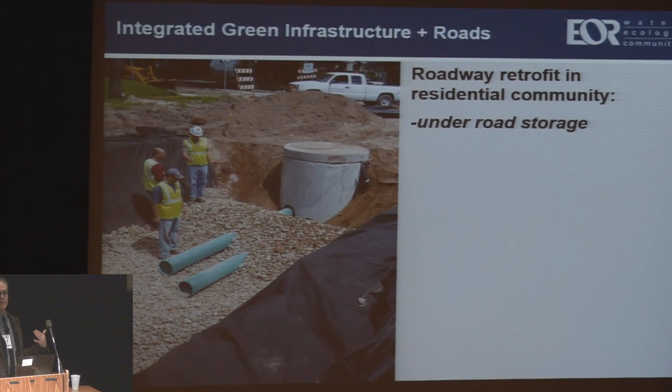We were at the city of St. Paul, surprisingly enough. They had some streets that did not have a lot of utilities in them, and they have very good sandy soil, so we ended up putting infiltration trenches underneath the roads in certain sections of St. Paul. Many of these areas have had no discharge since we built these almost 10 years ago.

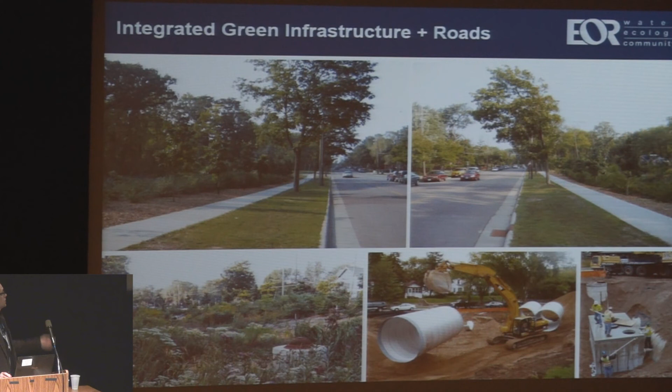This was a large underground chamber system that collected a whole section of neighborhood, where again they didn't want to do a surface feature because they wanted a play area and green space above. So we did it underground, and this has not had a discharge. It flows to a lake in a park, and it's not had a discharge since it's been monitored over 10 years.

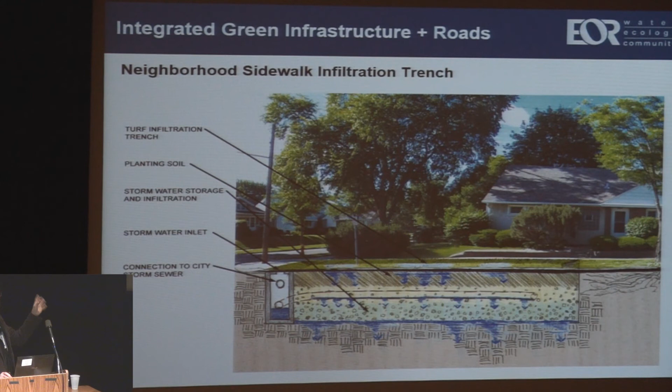In one case, we did an infiltration trench off the sidewalk, again where there was some sensitivity to having a rain garden. I guess the nice thing about it is there's a lot of sweet tools, a lot of different approaches you can use to do this the way you want.

Can I wrap up here? This just gives you an idea of the northwest area of Inver Grove Heights. This map, there's probably 3 or 4 new developments that I could add on here that have either been recently permitted or are right now coming in.

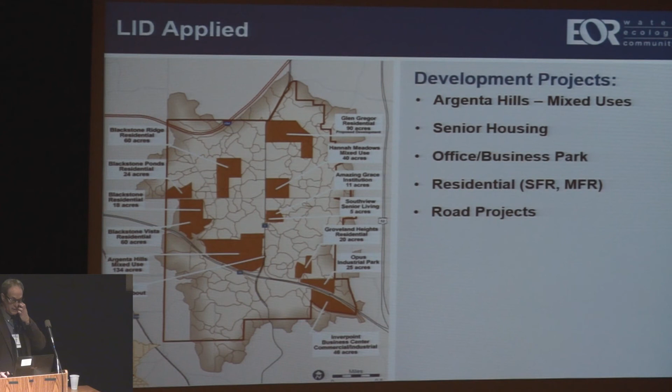We've had a whole mix of uses. We had the Argenta Hills, half commercial, half residential. We had a senior housing project, office parks, proposed a lot of single-family residential, and townhome kind of developments. So we've seen now every kind of land use type that we could encounter, and feel like that's worked quite well.

One of the other reasons we were very happy and feel like this is a precedent-setting type project is we submitted this through an awards process. The American Council of Engineering Companies does a big award every year and takes applications from all over the country. We went through the state award and moved on to the national award, and they had 170-some applicants, with 8 of the top projects last year selected for an award. This was one of the projects that was selected.

I think it really does set a new tone for how stormwater can be done differently, and there's a lot of advantages to doing it differently. It's not necessarily a loss, it's not like you do one thing and lose something else. You can actually put it together in a win-win kind of way. So I think this is kind of the trend of the future, the paradigm of the future, trying to look at how you can take this green infrastructure, and I think that's why that term is becoming more popular now - you can create amenities on your site at the same time you're taking care of stormwater issues that you needed to take care of. So if I summarize again what makes it work, and maybe the take-home messages.

First of all, there was a big emphasis on keeping water at the site, and part of that was understanding the hydrology. You need to mimic what the natural hydrology is there. Don't try to force something that may not work, but you need to understand what does work there, what naturally works, and so what you can work with.

Integrating the stormwater with the land use, we've got a lot of win-win situations where we were working with the planners and we were both getting benefits. We did look at some of those natural landscape features, like those large depressions and the good soils, and made sure that we planned that into our design.

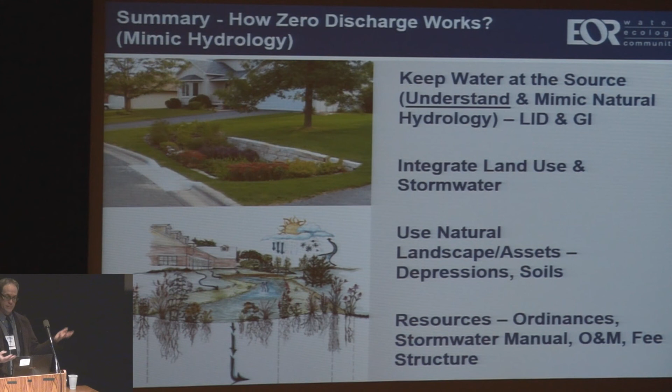So if you think back to our original slide, what is the natural condition of your watershed? What is it that it naturally wants to be? That's really, I think, something that oftentimes gets overlooked in a lot of design processes. We always want to jump ahead to: well, this is what I know runs off of my proposed land use, whether it's urban or even agricultural. So that's what I'm going to plan for. But we really need to step back and take a little more time to think about what is the natural type of system that you have and work with that.

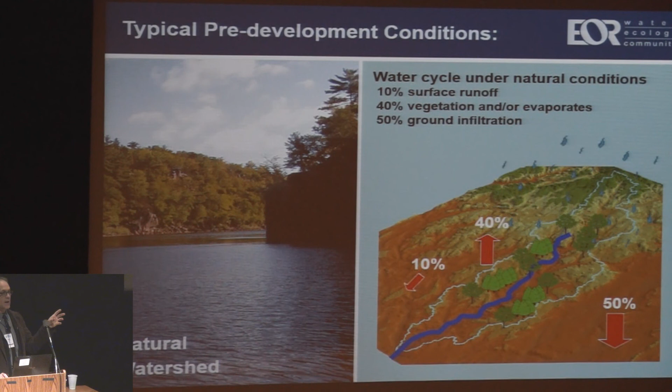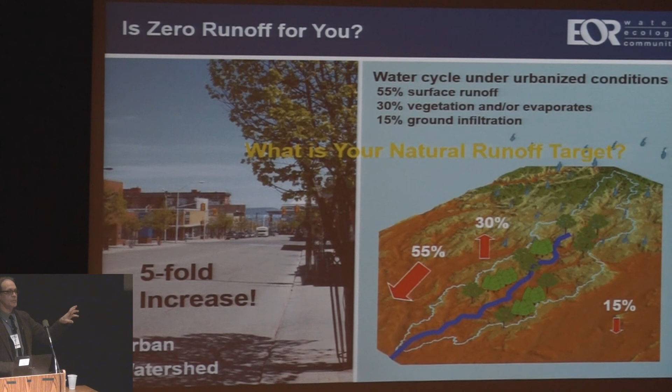So I think that's the take-home message for me: try to figure out what's a reasonable target for your site. In our case, it was 0 runoff. Maybe in a different site, it's 15% runoff. But at least come up with that target, understand your site, and then I think you can easily design to accomplish that kind of performance, and not just give up and say, okay, we're going to have a 5-fold increase or a 3-fold increase in the runoff. We can get back to something that's much more manageable.

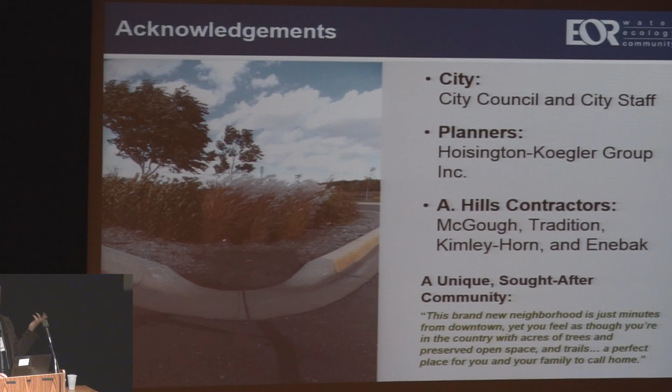Last, I'll just acknowledge the city staff and the council for jumping into this new paradigm, both feet in, and the developers and contractors for Argenta Hills, who were actually very good to work with. With that, thank you. Maybe time for a few questions.

Question was, going back to development approaches, do they work in all sorts of different places in the country, or landlocked areas like this? Good, very good question. They apply everywhere. They're being used a lot on the East Coast, Washington, New York has a pretty aggressive system, Pittsburgh, West Coast, all over the country. Just as long as you understand you're trying to mimic your natural setting, that's a good benchmark to start with. So you don't say, well, this place has 0 runoff, I'm going to go to the spot that has clay soil and high water table and expect that benchmark to apply properly. There are the same techniques basically - the plants and the soil do a lot more of the work versus sending it downstream, and that's what takes care of it.

I have a question. So you said this is a new development. So how can you prevent the water... developments are actually, you already have cities there. How can you take those cities and convert them into this new form?